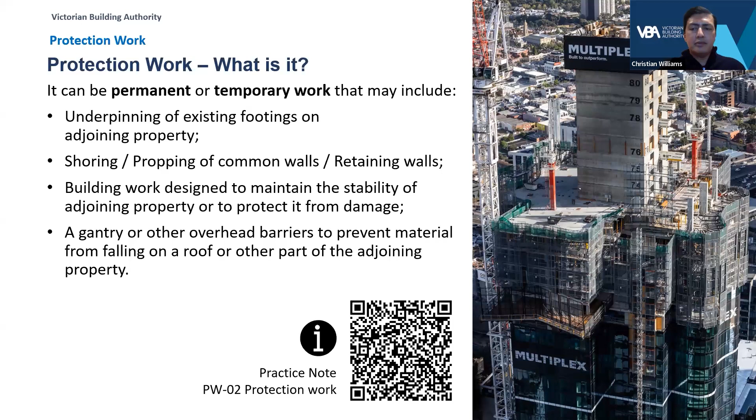Let me further elaborate on the definition of what protection work is and why we need it. When an owner is entitled to carry out building work on their land, sometimes that work has the potential to cause damage to adjoining properties. And this must obviously be prevented.

Fortunately, the Building Act 93 and Building Regulations 2018 provide a statutory process for the protection of adjoining property from the risk of significant damage due to the proposed building work. Regulation 111 of the Building Regulations 2018 requires the relevant building surveyor, when assessing an application for a building permit, to make a determination as to whether protection work is required to protect an adjoining property.

This is when the property may be at risk from damage from the building work. It could be, for example, any of the following common scenarios.

Where building work is proposed on or near a boundary which consists of excavations, site cuts, changes to foundations or footings, or demolition work.

Another common scenario is when there are existing buildings, retaining walls, or structures near the boundary or on an adjoining property that could be affected.

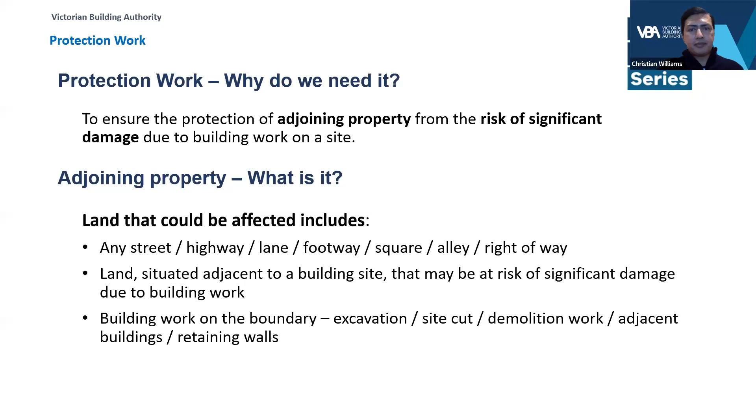Quite often or not, one may be faced with the question of trying to decide whether it is protection work or whether it's building work. Moreover, whether protection work can or needs to be done on the adjoining land or from the side of the property boundary where the building work is being carried out, or maybe both.

Where protection work needs to be done on the adjoining property, Section 95 of the Building Act 93 sets out the process that allows access to the adjoining property to undertake the required protection work.

A question often posed here relates to accessing the building site to use the adjoining property. For instance, building work may be designed in a way which requires access to an adjoining property in order to carry out the building work.

For example, building materials may need to be lifted over the building site with a crane that must swing over adjoining property, or the preferred construction of masonry walls on boundaries are to be constructed or finished from the outside of the property boundary of the building site.

Where the construction process requires access to the building site via an adjoining property, this is not protection work. It should be remembered the protection work process does not entitle an owner to freely access an adjoining property to undertake building work without consent.

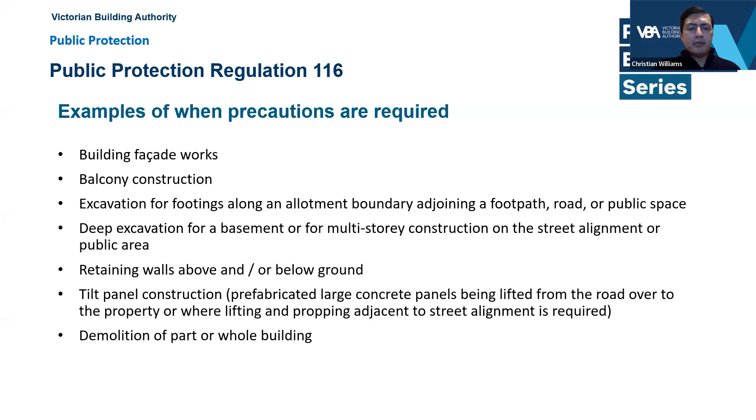So what are the responsibilities of the RBS? They must assess documentation in the building permit application and consider the extent of proposed building work and the associated risks to safety that the public may be exposed to as a result of that building work.

Once the RBS determines that precautions are required, the applicant will need to provide details of the type and method of precautions proposed.

The RBS must assess the proposed precautions under Regulation 116 and, where required, confirm the adequacy of the precautions via an on-site inspection prior to the building work being undertaken.

If the proposed precautions involve a projection beyond the street alignment, Regulation 116, Sub-Regulation 4, requires a report and consent from the council prior to issue of a building permit.

Council will again assess the proposed precautions and conduct an inspection to determine their appropriateness. However, some councils may not offer a report and consent, but deal with precautions under a local law. If the proposed precautions comply with the local law, there is no need for a report and consent.

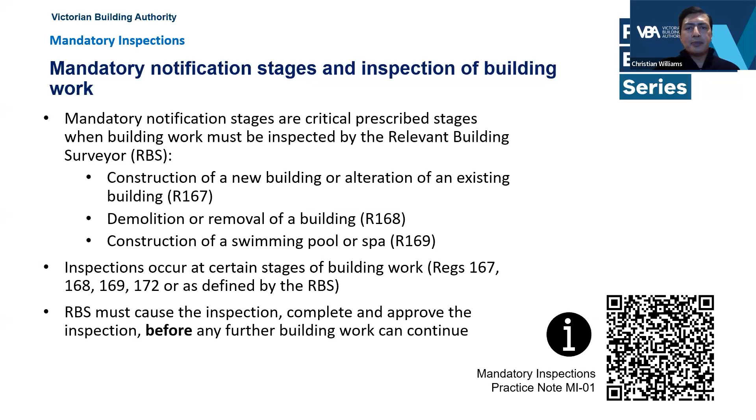Now let us move on to what the prescribed notification stages are for the construction of a new building or alterations to an existing building under Regulation 167. Those stages are: before placing a footing, before pouring an in situ reinforced concrete member, the completion of framework, the inspection of fire and smoke resisting building elements as required under Regulation 172, and then the final on completion of all building work.

It must be noted that Regulation 172 requires additional mandatory inspections in each story of a Class 2, 3 or Class 4 part of a building for any building element of lightweight construction required to resist the spread of fire in at least one sole occupancy unit, checking of each stair shaft, lift shaft, or service shaft of lightweight construction required to resist the spread of fire, and the components and junctions of these building elements.

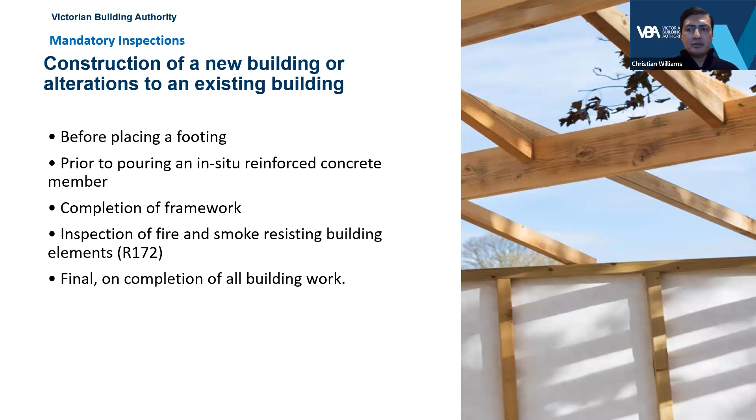To continue on with the prescribed mandatory notification stages, the next stage is for the demolition and removal of a building under Regulation 168, which are: on completion of precautions for public protection that we mentioned earlier under Regulation 116, and the precautions in accordance with Australian Standard AS 2601, the demolition of structures, under Regulation 117. Then a final inspection upon completion of all demolition or removal work.

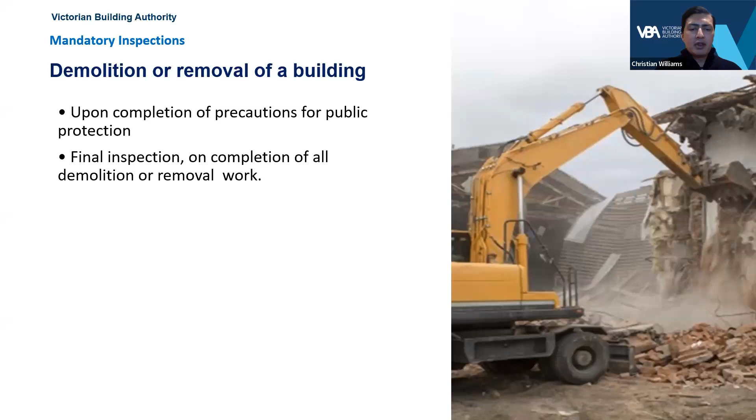And lastly, the prescribed mandatory notification stages for the construction of a swimming pool or spa under Regulation 169 are: completion of the excavation for swimming pool or spa, before pouring any footing or in situ reinforced concrete member that is specified in the relevant building permit by the RBS, the completion of any precautions for public protection under Regulation 116, such as a temporary swimming pool barrier, and then the final on completion of the swimming pool or spa and related safety barrier.

If a building permit incorporates multiple types of building work, for instance, the construction of a swimming pool, retaining walls, dwelling, demolition, and construction of a new garage, the building permit must list the different types of work and specify each of the specific mandatory notification stages for each type of work that are applicable.

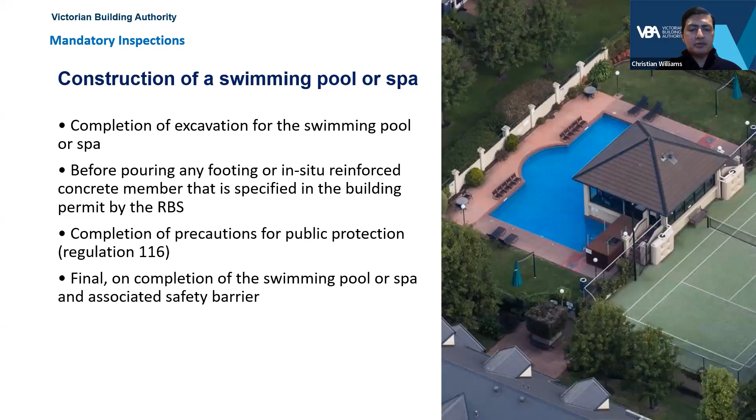Now let's move on to discuss the differing roles and responsibilities for these building practitioners during the mandatory inspection process. Firstly, starting with the RBS, their role is to maintain building safety standards, ensuring that mandatory inspections are carried out in accordance with the legislation.

Section 35 of the Building Act provides a general power for an RBS to cause an inspection of the building work at any time, whether a mandatory stage has been completed or not. Accordingly, when assessing a building permit application, the RBS should consider whether any inspections should occur in addition to the prescribed mandatory notification stages.

An RBS may carry out the inspection themselves, or they may cause a person specified under Section 35B of the Act to inspect on their behalf. The RBS must not cause another person to carry out inspections unless that person is a registered building surveyor or registered inspector and authorised under that registration to carry out the particular inspection, or a prescribed person to carry out a prescribed class of inspection in accordance with Regulation 174.

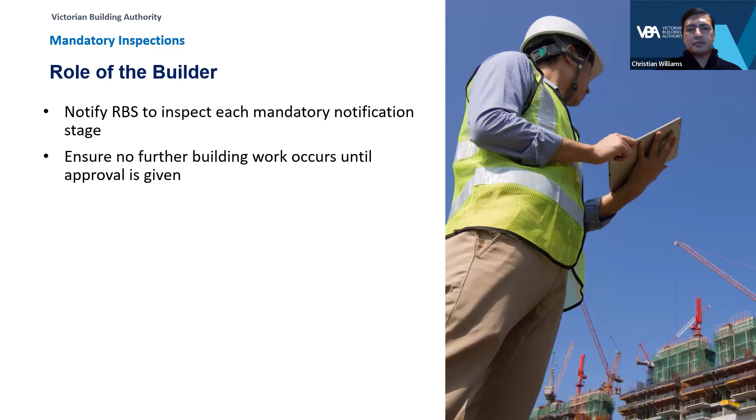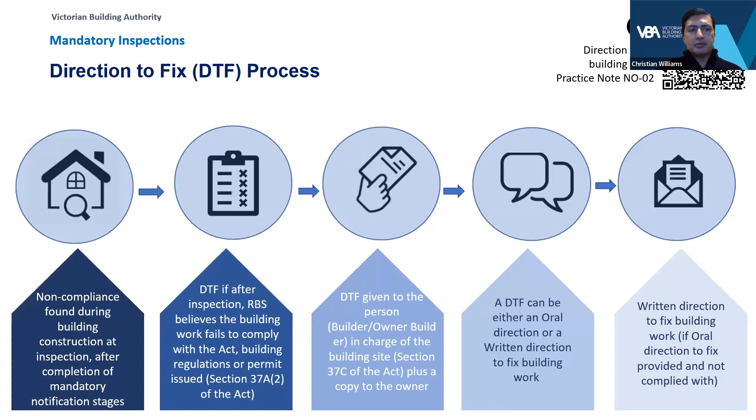A direction to fix can be oral, which is a spoken direction to the builder, providing the builder 7 days to comply with the direction before a written direction must be given. It is recommended that an oral direction to fix process be given initially if it is considered reasonable that compliance could be achieved in the 7-day timeframe. The builder should be advised of the timeframe when giving direction to fix.

An oral direction to fix can be given by the RBS or a registered building inspector who is carrying out an inspection on behalf of the RBS. However, it may not always be appropriate to give an oral direction to fix. A written direction to fix can be given without an oral direction being given first. When a written direction to fix is given, a copy of it must also be provided to the owner to ensure they're aware of the items that do not comply.

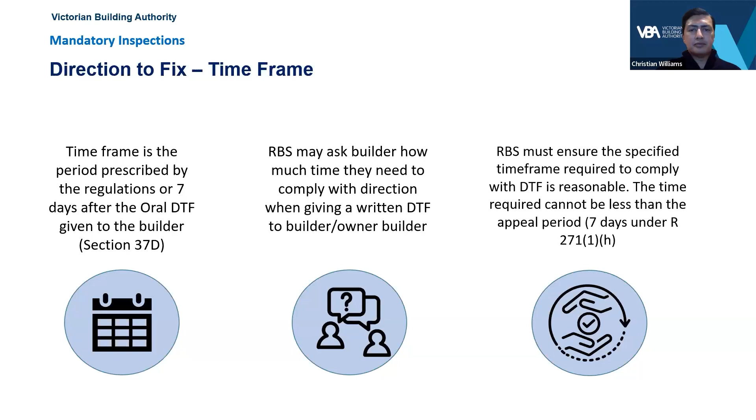Under certain circumstances, the builder may ask the RBS for an extension before the end of the specified period for compliance with the direction, and the RBS may grant the extension if he considers it appropriate to do so. If an extension of time is granted, the RBS must give written notice specifying the period of extension to the builder, with a copy provided to the owner.

A builder who has been given a written direction to fix may appeal to the Building Appeals Board under section 138A of the Building Act, but this appeal must be made within 7 days of the written direction to fix being given, in accordance with Regulation 271, Sub-Regulation 1H of the Building Regulations 2018.

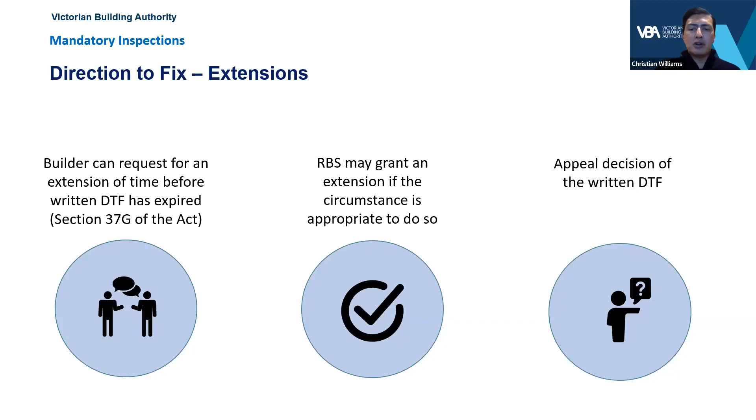Okay, it's quiz time again. Here's another 3 questions that we've put together for you as a recap of the content so far. We're actually going to move past the poll questions in the interest of time, so they are provided on the slides and we will supply them to everyone on our website. I'll read through it, thank you.

So question 1, who causes an inspection? Is it the relevant building surveyor or the builder? The answer is the RBS.

Question 2, true or false? During construction, the builder named on the building permit, after completion of each mandatory notification stage, must ensure that the RBS is notified that the stage is ready for inspection. Answer is true.

Question 3, true or false? A copy of the written direction to fix is given to the owner. True.

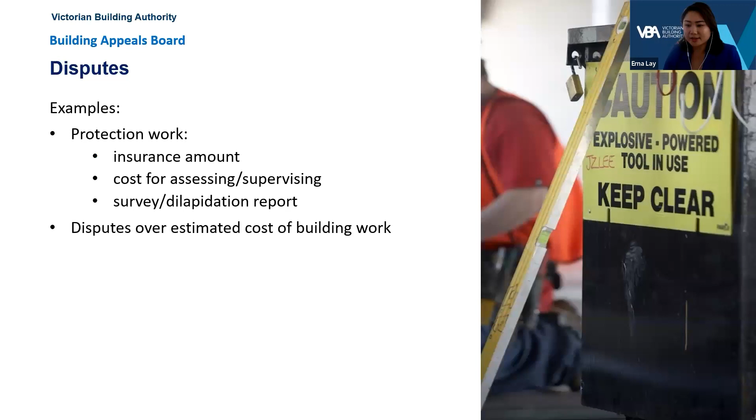Sure. So one of the pre-submitted questions was, if a Building Appeals Board application is made, should the RBS have their say beforehand? The relevant building surveyor who was issuing the building permit really should not be assisting the owner that is subject to the building permit in preparing a BAB application. The application is to be done by the owner and their agent, or the adjoining owner or their agent. The board could then consider if they require any input from the RBS before or during the hearing.

What can we do if an owner of the adjoining property keeps refusing to approve the protection notice being served? There's not much you can do other than it is up to the RBS to make their determination once the adjoining owner's provided the refusal using the Form 9. However, the owner or the adjoining owner still have a right to appeal that determination of the RBS, so they can take that to the Building Appeals Board if they feel that that's necessary.